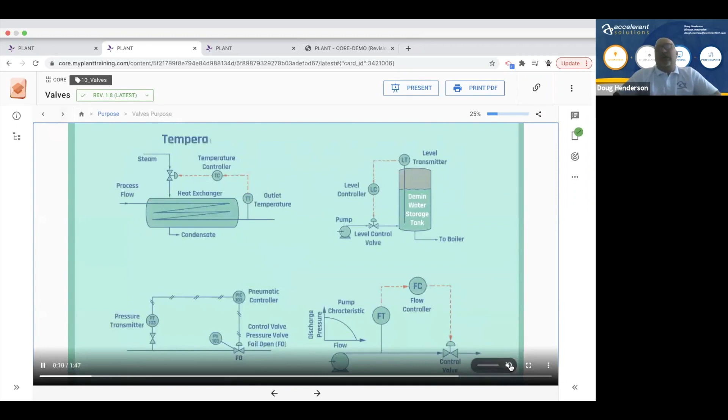So the first thing we did was we created a purpose video. This video is basically an introduction to what they're about to learn, similar to what you would do if you were the instructor on the podium. You would give them an intro to here's what we're going to talk about, maybe tell a sea story or something like that. That's what this video is aimed to do, kind of pique their interest.

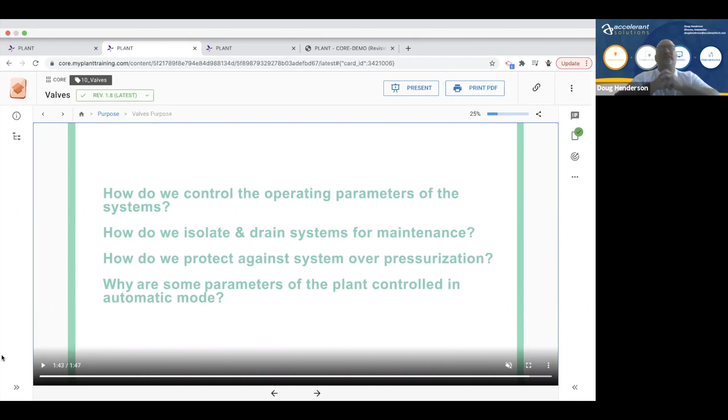And then at the end of the video, we present them with what we call essential questions. So it gets their mind working towards thinking about what to pay attention to, what's important. They're not necessarily totally objective based, but they are the important concepts that they're going to see, and they should be able to answer these questions when they've completed the lesson guide. The next section, of course, is the objective section.

Okay, the next section is, of course, the learning guide. And I'm going to use the term learning guide and lesson plan, so don't get those confused. Lesson plan is the entire thing. Learning guide is the learning guide.

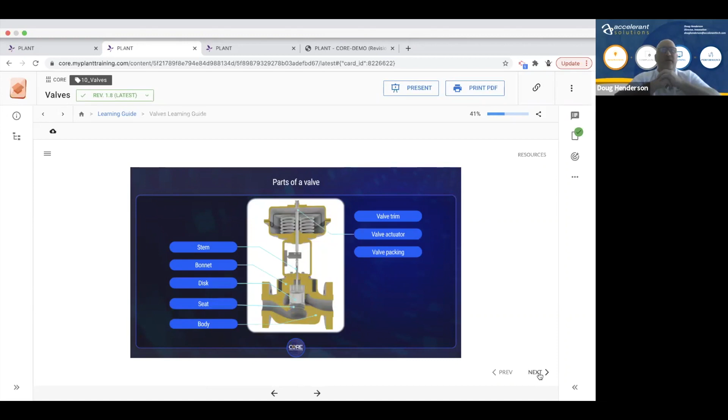Each one starts with a little splash screen, maybe another little video to get them started, but it navigates like any other computer-based training that you're used to. Next and previous buttons, you can move through the material fairly quickly. You can see there's some interactive buttons there that they could watch a video. Here's where we've taken an image of a 3D model and used that to present a topic.

The student has control of the menu for this, as well as the menu for the entire lesson plan. So they can open the menu for the learning guide. They also have a search function there that they can utilize with the magnifying glass. And we'll get to what the resource button does later.

So we're going to go through one of these areas here. We're going to go through the globe valves here and show you what that looks like.

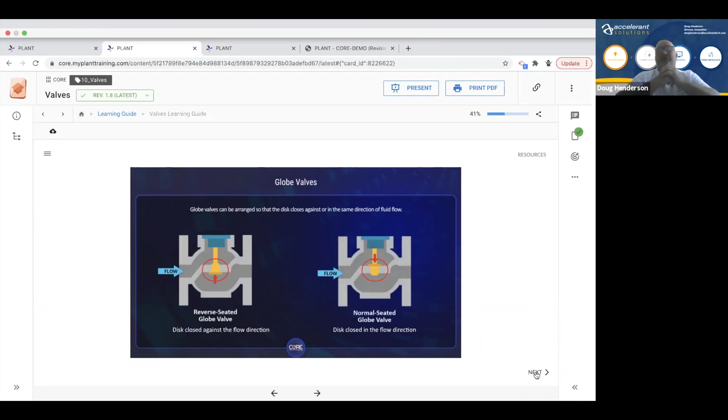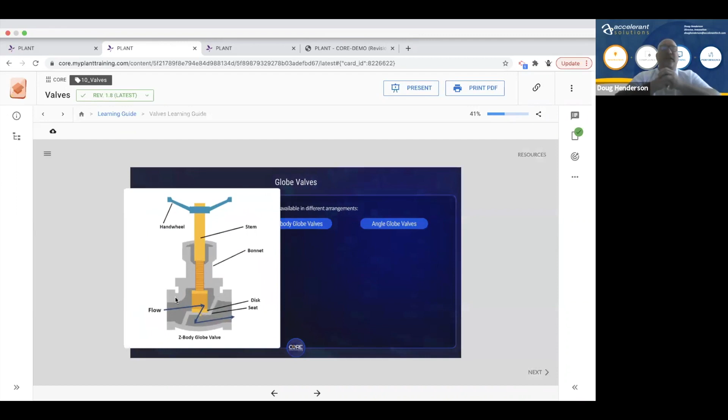So we've set it up. All the navigation is standardized across all the lesson guides. So the student only gets the option to continue to move forward. In this case, they can use the menu to move backwards, but they have to move forward through this if they're just following along. Our images allow them to look at the picture with zoom. You can see how it's staggered to have them do it in some orderly fashion, so to speak.

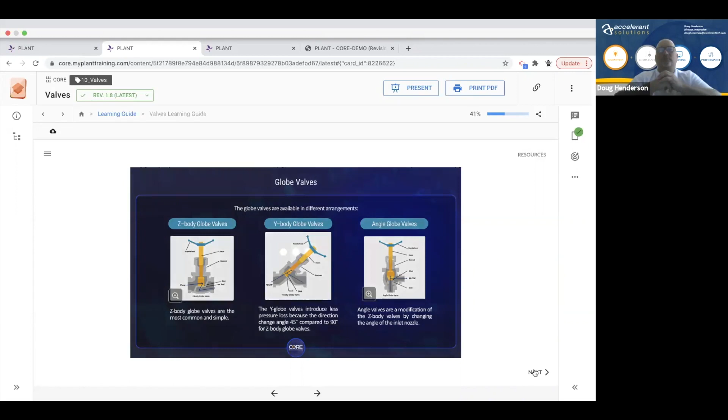And once they get through that sub-leg of the lesson plan, they'll eventually get to a spot where they have an item, as you can see up in the upper right hand corner, that will take them back to the original menu that they started from. And now the globe valves button has changed colors to let the student know, hey, I've done that part, and they can move on to the next section.

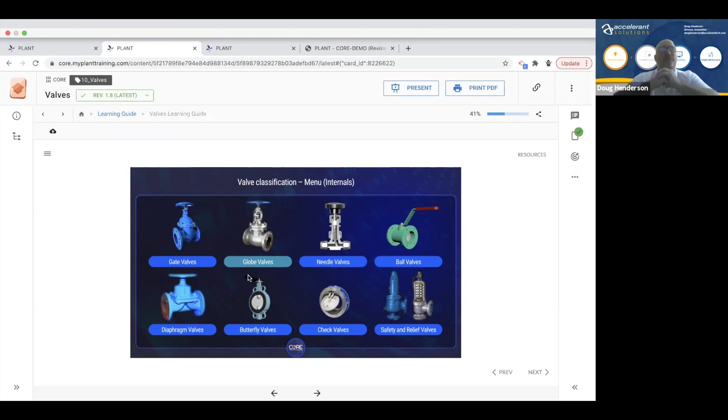We have other types of questions, but in general, those level of knowledge questions are filtered throughout, typically 1 to 2 per objective. At the end of the learning guide, we've included what we call a mind map. The mind map is a video summary of what they just covered. Similar to if you were the instructor at the podium, you would do a summary of what was covered during your training.

So what we've found with some of the other similar uses of a mind map is the students would look ahead, or they would download the mind map. Once they realized what they were, they would download the mind map before they did the learning guide, and they could jot down notes on this learning guide, print it out, use it to take notes, flip it over on the back, take more notes, and that would also help them to learn.

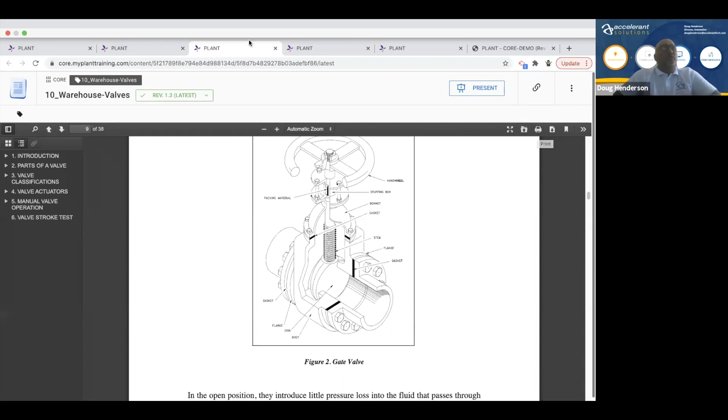Most of those PDFs for each of the lesson plans is roughly 35 pages plus or minus.

And then the last part of the learning guide, and I'll move forward to our 3D model page. So you can see the 12 models that are available here in the valves lesson plan. And we're going to show you the feed water heater bypass valve 3D model.

So all of our 3D models are relatively the same. They have the ability to open up annotations of the parts of the model. Student clicks on the numbers and it gives them a really short, discrete, but worthwhile description of that particular component.

A lot of our models have motion. So on the bottom left-hand side, they can hit play, the 3D model will move, and they can control the speed at which the model moves with the lightning bolt. Gives them a 0.1 to 2 option.

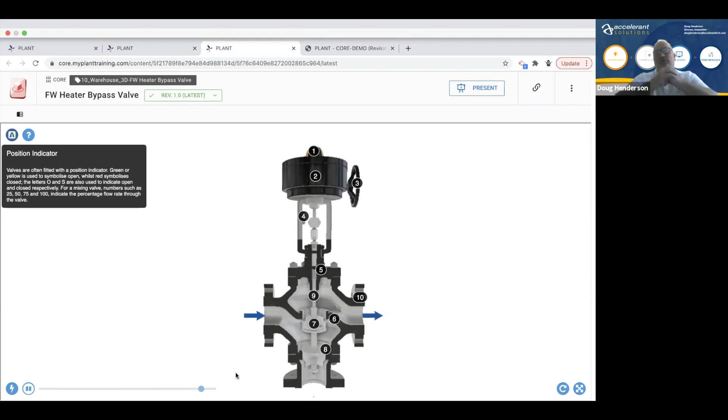They can also, on the bottom right, use the crosshairs to go to full screen so they can get a bigger view. They can also use what looks like a refresh button that actually causes the model to automatically rotate on its axis, and it's a continuous motion.

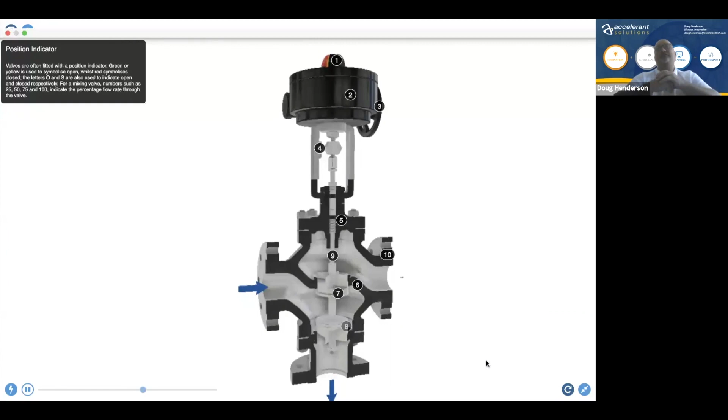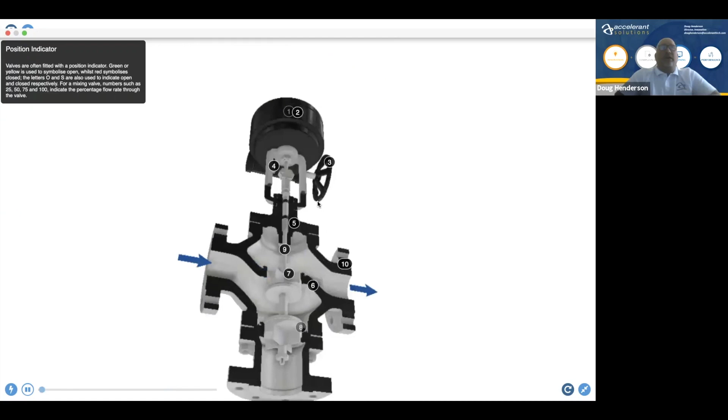Now, the other thing the student can do is use their mouse to move the model on a 3D plane. So they can move it around. They can also use the wheel of their mouse to drag it around on the 2D plane. And they can use the wheel of the mouse to zoom in and out so they can get a much better view of the model. And it's pretty detailed and very high quality.

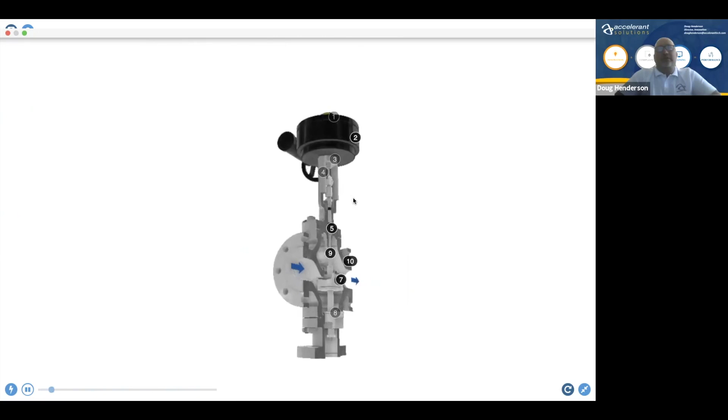You'll notice that as the model continues to rotate, the annotations go away. They turn gray. They won't let the student see the component unless they can actually see the component. The annotation will not work. And that's pretty much the gist of our 3D models.

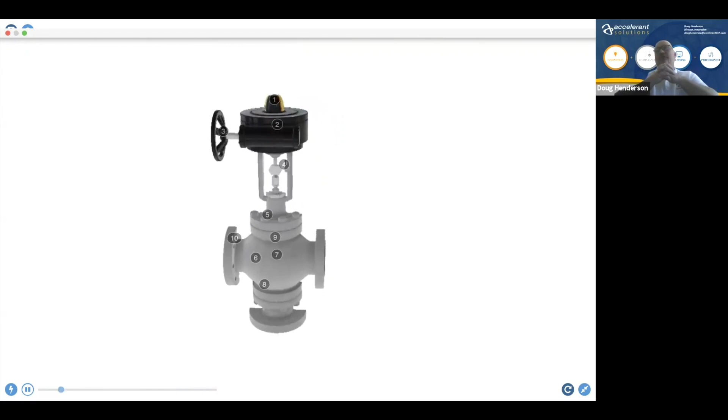If we go out of the full screen, I'll point you to the question mark in the upper left as well. That provides a video that gives the student a tutorial of how to do all of those features that we just showed you.

Okay, and the last part of every lesson plan is the mental gym. It's what you would expect, questions about the topic. We've included both multiple choice and interactive questions. I'd say on average there's somewhere between 20 to 35 questions per lesson plan. The multiple choice ones are similar to what we showed you earlier with the level of knowledge checks, and all of those level of knowledge checks are also pulled out into the mental gym.

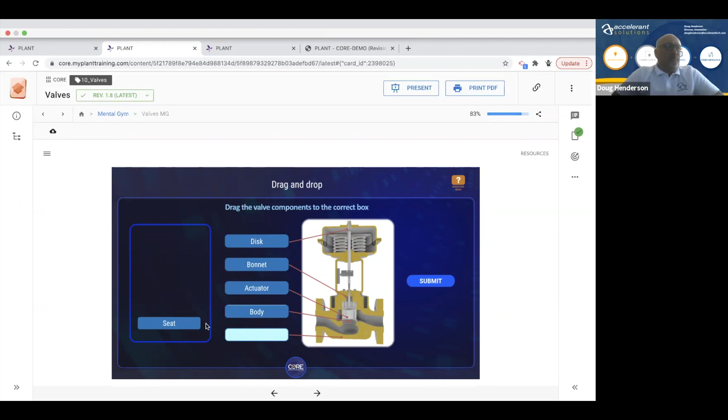Okay, so that's a quick demonstration and overview of what a lesson plan consists of.

The last part of a module is the serious game. This is something that we're super proud of, it's my favorite thing of all of them. I mentioned earlier the younger generation, they are tech savvy, video games is pretty big among other things. So what we did is we created a practice exam, if you will, but with a serious game, and it has a video game feel to it. It also uses a backdrop of a mission where they have to travel from planet Earth to planet Core to save a failing reactor, and the way they make it through this mission in space is to answer questions correctly.

So it's a review of the material, and it covers material from all of the lesson plans contained in the module. What you're going to see here is just a quick 1-minute video that gives you a little teaser on what a serious game looks like.

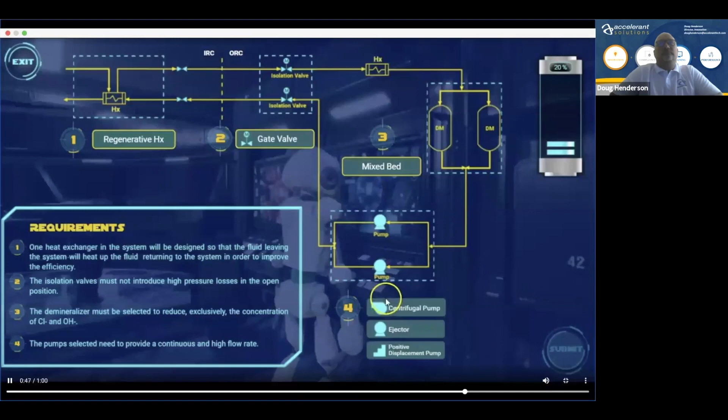I really like that video.

So you saw Agora, the robot, leading the student through the mission, and maybe you saw the little battery charge up on the right. So as they answer questions, they charge that battery, which is what they need to fix the reactor. It's pretty fun. And each module has its own serious game, so there's one for components, one for theory, one for thermo. We've created a serious game for both the PWR and BWR versions of the thermo and theory modules as well, so 5 total.

I'll say one last thing on lesson plans. For the full course, PWR or BWR, obviously you get all 3 modules, but we've also added an evaluation button for the full course that draws from all 3 modules. So the student can then get a practice exam of roughly 75 questions, and again they can do that as many times as they want.